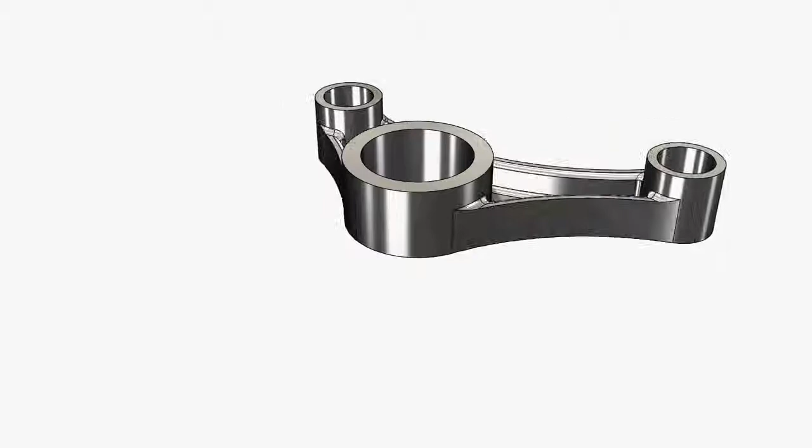In this video, we're going to take a look at the Model Mania Design Challenge from 2013. If you're unfamiliar with Model Mania, it's a design challenge held every year at SOLIDWORKS World where attendees are given a drawing like this, and they're tasked with creating the part in SOLIDWORKS both as quickly and as accurately as possible. Now, if that wasn't enough, when they're finished, they're given an additional drawing with a series of changes and tasks to perform on the part.

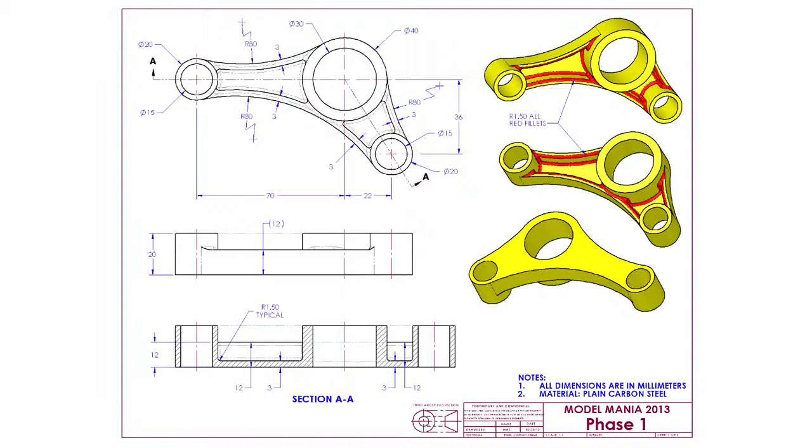For this initial phase 1, let's take a look at how we'll approach this. Most of the geometry and dimensions are defined in the top view. It's actually a pretty simple part to create. It consists of 3 circles with bores going through them and a series of walls joining them together. You can see in the front view in section AA that these are all extruded slightly different depths in the up direction. Finally, do notice that a material has been specified over in the notes section of this drawing.

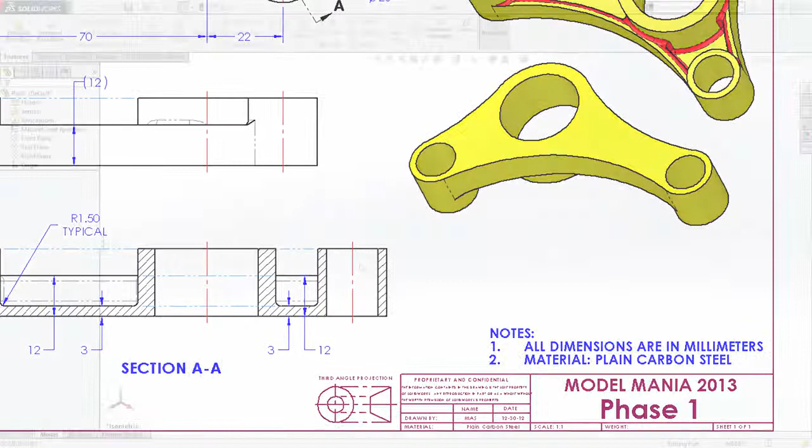So let's dive in and start with that top view. We're going to leverage a sketch that contains all the geometry and use contour selection when we go ahead and create the features for this part. We've discussed this in great detail in many of the videos in this series.

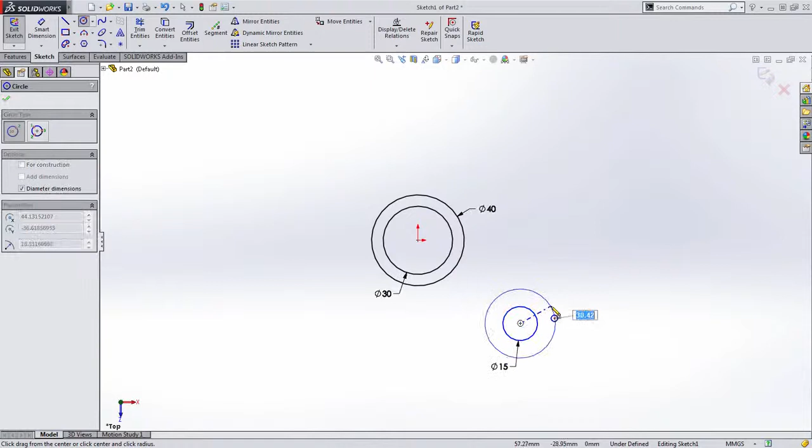I'm going to go ahead and just start sketching out this geometry by typing in the values where needed. In this case, it's just a series of circles which have pretty simple dimensions on them. 15, 20, and then you can see I've already defined some of the other dimensions. These are then defined by distances from the center. In this case, 22 millimeters to the right, and down from the top, this is going to be 36 millimeters. Notice the geometry turns black, letting us know that it's fully defined.

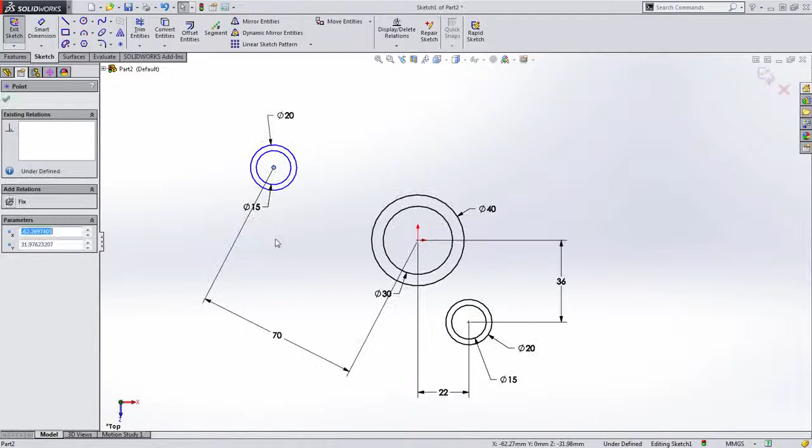Let's go ahead and define this circle out here to the left-hand side at 70 millimeters away, and notice when I add that dimension that the geometry is still blue. That's because we didn't do anything to establish that this circle is always horizontal to this one. So I'm going to select the 2 center points and choose horizontal from the quick pop-up menu. So that's all fully defined.

There's also a series of arcs that joins this together. I'm going to do this by creating 3-point arcs from one circle to the next and approximately drawing it in place. We can also put the radius in there while we're creating this if we want, just by typing that. So again, this is 80 millimeters. But notice when I do this, none of these were created tangent to the circles that they're attached to.

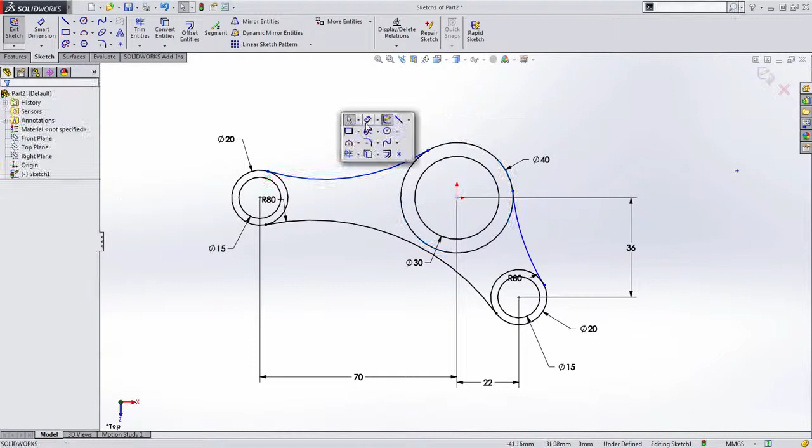So we're going to go back and add those tangency relationships at each one of those intersections between these. I'm going to just go ahead and window select those, and we didn't add a radius here, so I'll add that now. And again, let's just add these tangencies. I'm going to just move these radius dimensions so that they're a little bit easier to see. Now notice I did define each one of those individually. That's how they were called out on the drawing.

And the last thing we need to do is go ahead and do this wall offset while we're at it, of 3 millimeters. So I'm going to select any geometry that I want to add in this case, and notice when I select all of these, I just go ahead and right click and add the geometry like so. Sometimes they may offset in a different direction depending on the order in which you created those, but in this case we were able to do that all with one offset feature.

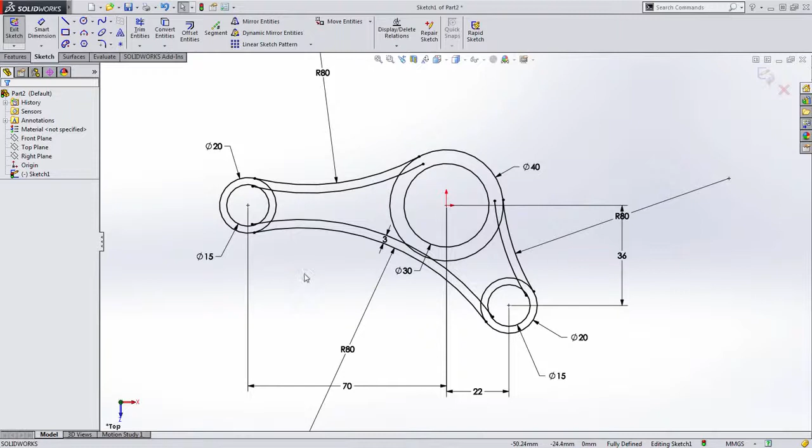Now you're probably thinking I'll need to go through and trim all this geometry up, but that's actually not necessary. Let's go ahead and close this sketch and start creating some of these extrusions.

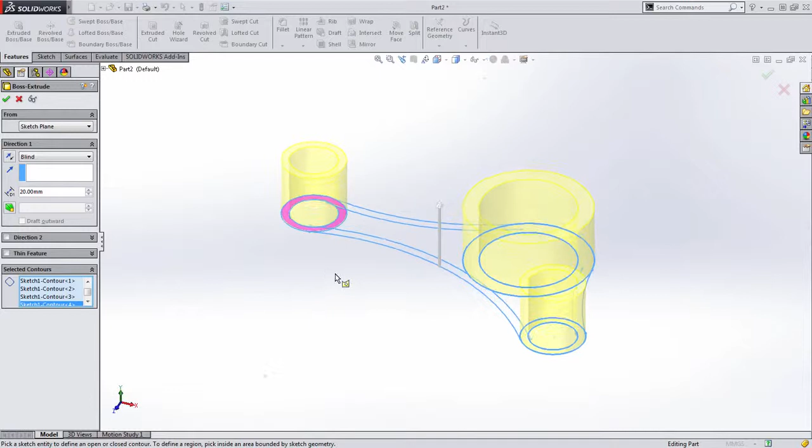I'm going to go ahead and select this circle, and notice what happens when I do this. I'm going to specify the appropriate distance. It created the region up to there. All I need to do is select this additional region. In addition, if you want to make this simple, just go ahead and select the circle itself and then choose the circle in the center to then remove that from that region. So there's really 2 different approaches you can take when doing this. I'm going to go ahead and press OK.

When I do this, you'll notice that a solid bodies folder appears in the feature manager tree. Because these bodies are disjointed, we're actually working in a multi-body part file. That's actually not that important for what we're doing right now, but it will play a role in what we're doing later on with some of the changes.

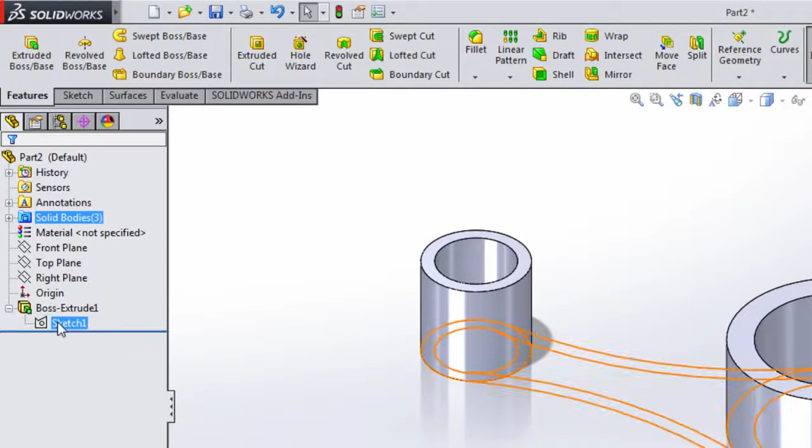Now what I want to do is start joining this back together. In this case, I want to create the walls on the outside. To do this, I'm just going to go into the feature manager tree and reselect that sketch we created and choose to create an extrusion from it again.

Like before, I'm just going to choose the appropriate regions that I want. In this case, the 3 outside wall regions. Now their distance is different. It's 12 millimeters, so I'll enter that in. And notice that merge results is automatically checked.

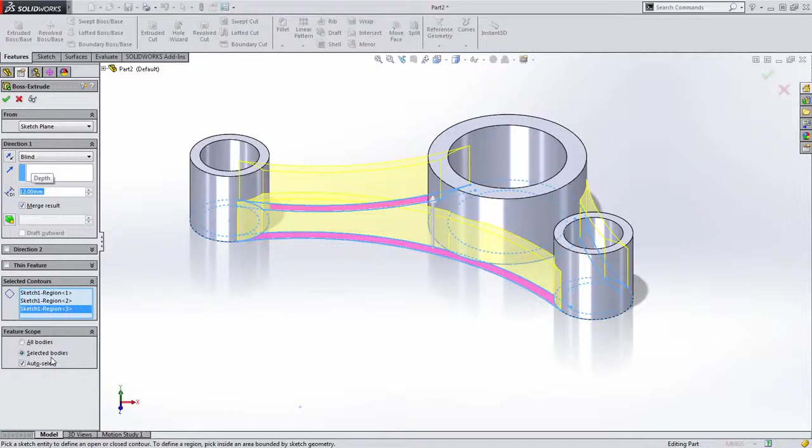This is always the case by default. In addition, the feature scope by default will try to merge whatever it can. In this case, it will end up being all 3 bodies. When I do that, the multi-bodies folder goes away, so adding that feature joined those back together into a single body part.

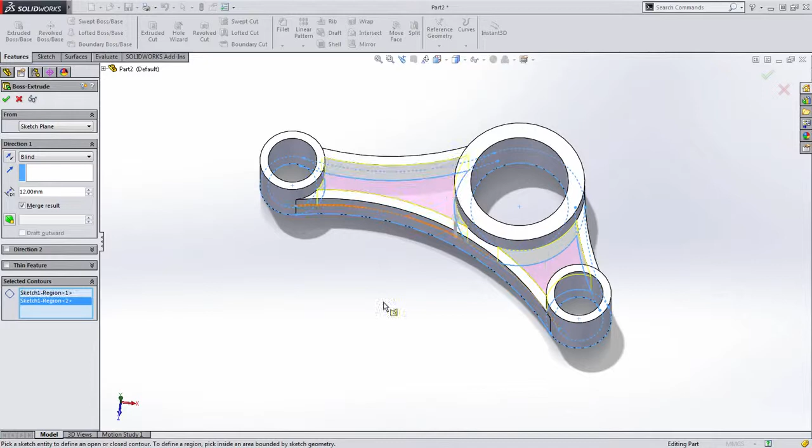Finally, for the material on the bottom, we're going to go back in and choose that same sketch, and we're just going to select the regions on the inside. Again, they do have a different depth, in this case 3 millimeters.

Finally, there's a series of 1.5 millimeter fillets that we want to add, and to do this, I'm going to select these faces on the inside of these pockets. Remember, selecting faces allows you to just select that face, and then it'll automatically capture all the edges of that face, and because of tangent propagation, any additional edges that might be tangent.

We'll do the same thing on the other side. I'm going to go ahead and grab these 3 faces here, and then I'm just going to right click to confirm. So our part's almost done, but there's one critical feature we need to add yet, and that's the material that was defined for this part, which was plain carbon steel.

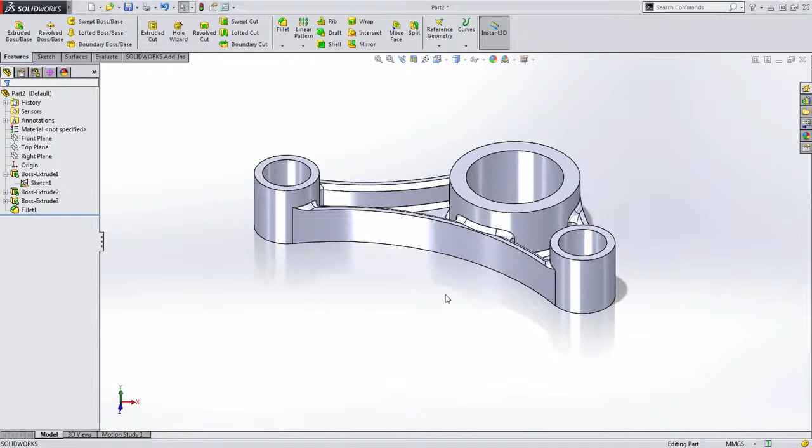To do this, we simply right-click on the material node in the Feature Manager tree. If the material you need is in your favorites, you can select it here. If it's not, you can go into the entire library that's available.

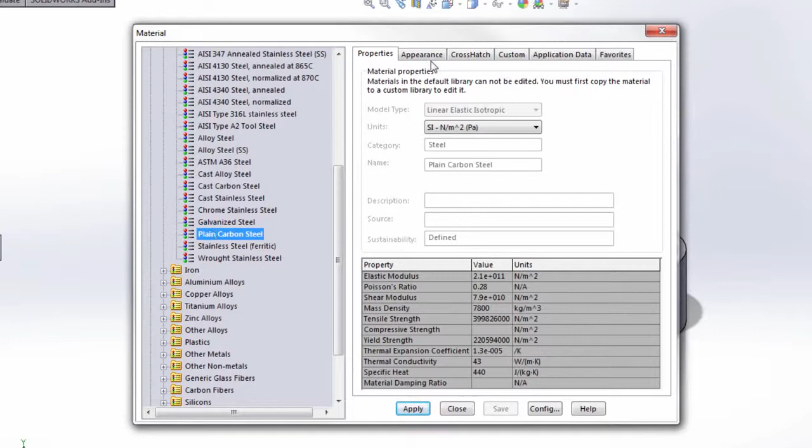When you're working with a library, just choose the appropriate material type, in this case steel, find the material you're looking for, and SOLIDWORKS will automatically apply the appropriate appearance and crosshatch in a drawing, but more importantly, the physical properties of the material, which define how strong it is, as well as things such as its density.

So I've gone ahead and applied the material. When I exit, you can see that it's graphically changed, but if I go to Evaluate and go to Mass Properties, we also get an accurate weight of this part as well.

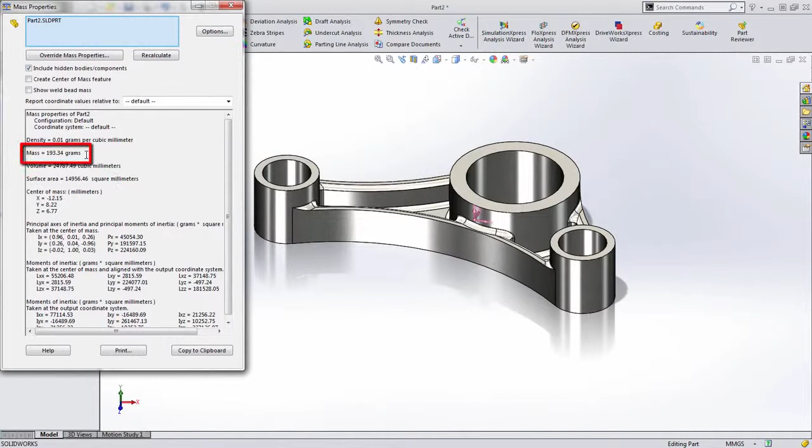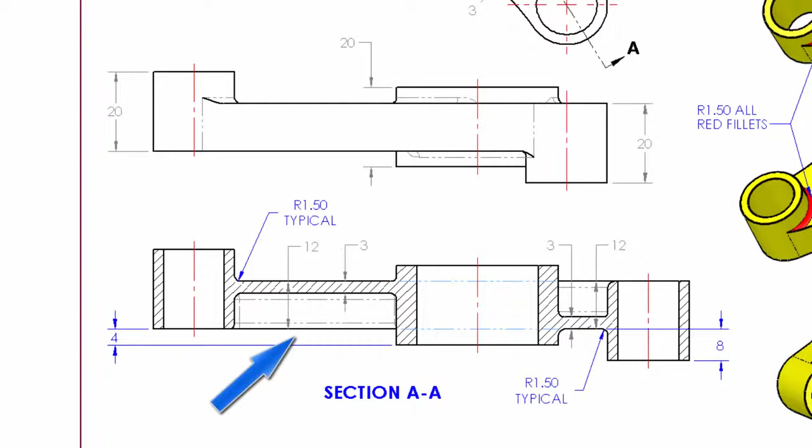In addition, notice in this section view that the bottom surface that we had created is no longer there and instead has been added as a top surface. Finally, there have been some subtle changes made to the fillets.

Additionally, we do need to perform a simulation on this part by fixing the center cylindrical face and applying a load to the outside right face. So let's go into SOLIDWORKS and look at how we can tackle this.

Let's start with the design changes themselves. First, we want to make those adjustments to those cylindrical bodies. I'm going to go ahead and roll my rollback bar back to when we created these 3 cylindrical bodies.

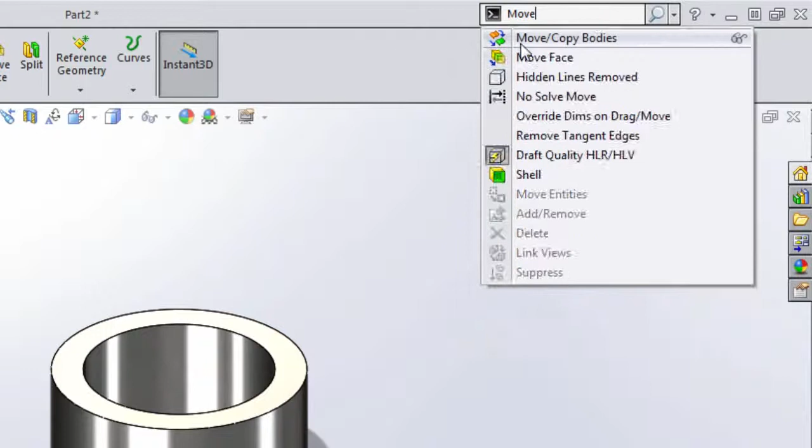If you remember, I made a specific point to mention that we were working with multi-body at this point. This is great because it allows us to, instead of deleting features and adding new ones and applying offsets, just do a quick search in our command search for the Move Copy Bodies command. Likewise, you could have it on your toolbar already. I just don't. Then we can select each body and just make a quick adjustment to it.

In this case, this one is moved down 4 millimeters. So notice I just grab the arrow, drag it down, snap it to the ruler, and press OK. But I had mentioned, what if this was a single body?

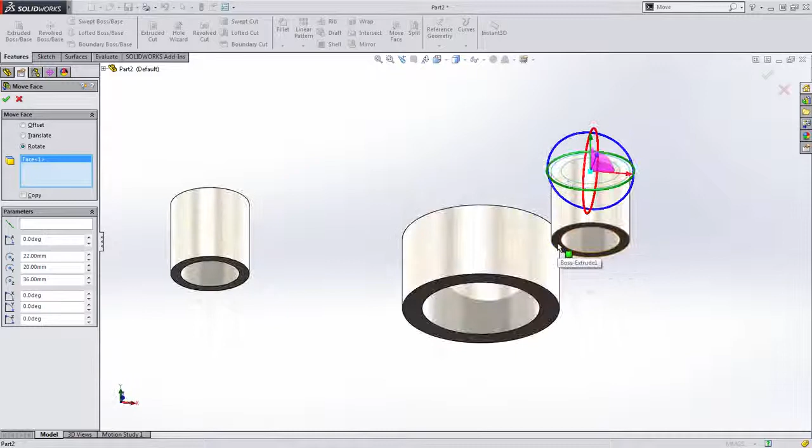Move bodies will move the entire body. Move face, oops, not intersect, let me hit escape out of there. Move face is an alternative where you can grab the faces you want to move very similarly. And in this case, I'm going to use Move Face to drag this down 8 millimeters in this case.

So we've dropped that down, that looks good, we press OK. We get the same results, just one is a little bit easier to use. Move Bodies would be easier when you're working in multi-body. Move Face is great if everything's joined together and you want to just move a few faces. So keep that in mind.

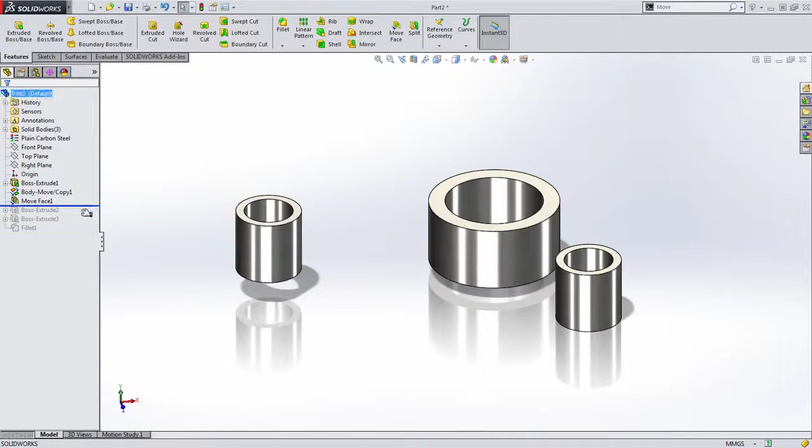We're then going to go ahead and roll down, and notice that our walls don't really have any changes that need to take place to one another. However, when we do look at our next feature, that bottom surface, it no longer exists on this left-hand side of the part, and instead there's a new surface up here at the top.

So what we're going to do is edit this feature. I'm going to deselect this region to exclude it, then go into that feature and reselect that initial sketch, and choose to create an extrusion using that same region.

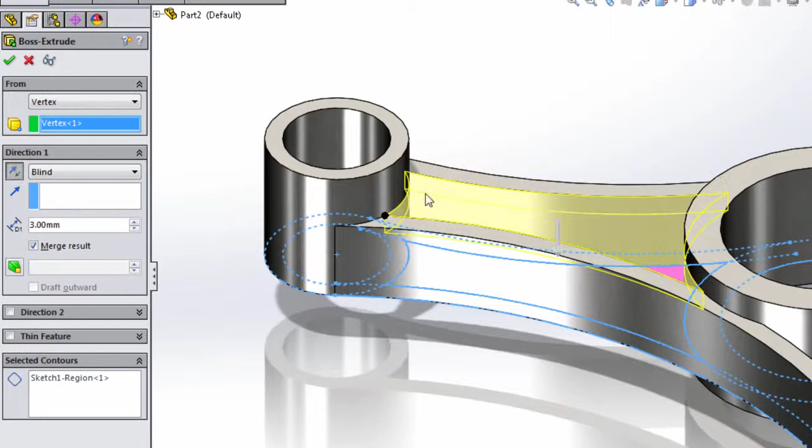Now we want to get the extrusion here just right. An easy way to do this is with the From option. I'm going to choose From Vertex, select a vertex up at the top, then use the direction of Blind and set that down into the part. Very quickly, we've made that adjustment that way.

Now, because we deleted that bottom surface face, some of the faces we selected for this fillet no longer exist, and they'll need to be redefined. So we're just going to come in here and reselect those.

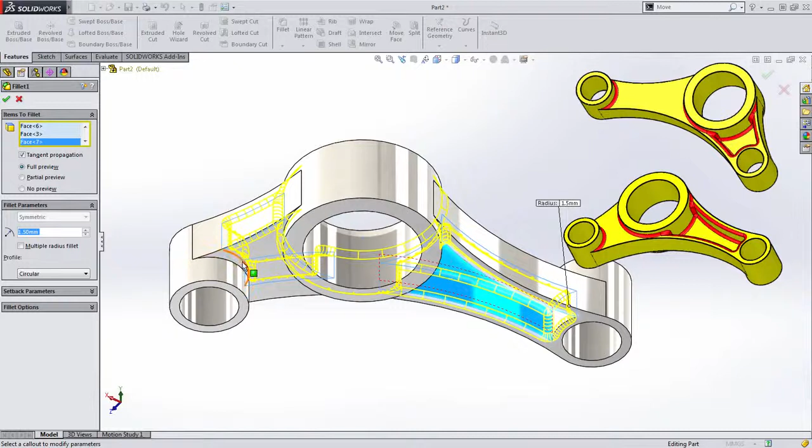Additionally, you might notice on the drawing that these additional edges have been added to the fillets. This is one of the things we mention to check for accuracy when you do Model Mania. Missing a fillet like that could be the difference between winning and losing the competition.

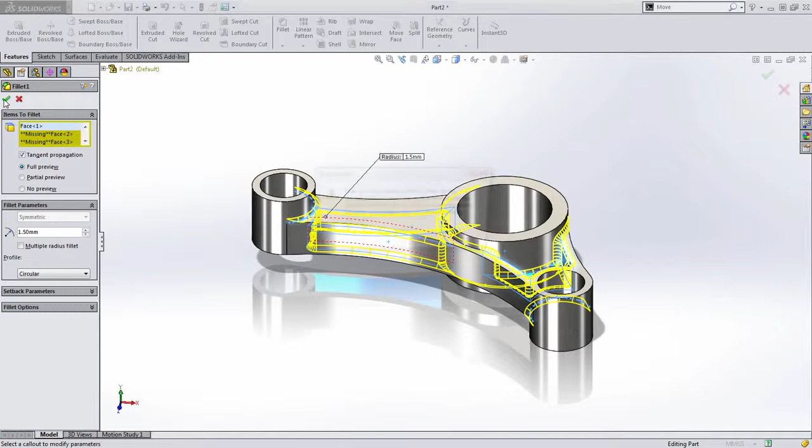Now you'll notice that those faces that are no longer there are still highlighted. You could delete them out of the property manager here, but simply pressing OK, SOLIDWORKS will let us know that there are some missing entities. Pressing yes will automatically remove these, saving us that step.

So we've made all the physical changes to the part here pretty easily using a few unique features: move copy bodies and move face. What we need to do now is perform a simulation.

To do this, I'm going to use Simulation Express because it's found in every version of SOLIDWORKS. Likewise, you could use SOLIDWORKS Simulation, which provides many more options than what we'll see here. Simulation Express is a wizard's format that kind of walks you through the process.

The first thing we need to do is define a fixture. In Simulation Express, we can only add a fixed type fixture. If we were using Simulation, we could use things such as a hinged fixture or sliding face, different things like that. But this serves our needs perfectly in this case.

We're going to choose that inside cylindrical body and press OK. We could add more if we wanted to at this point, but let's move on to adding a force.

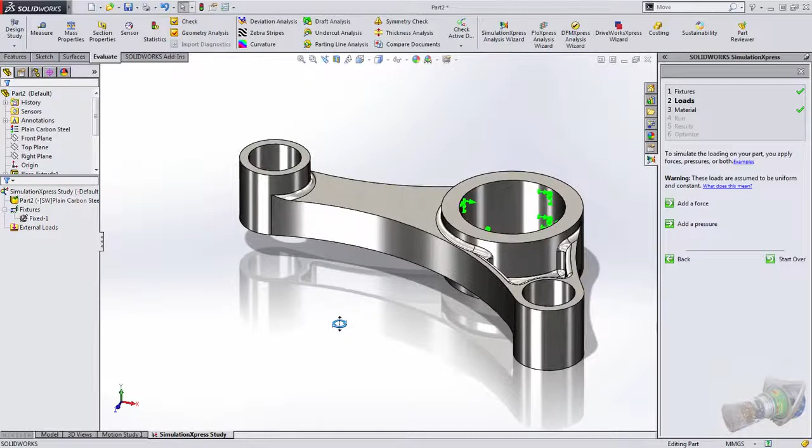Here we have the choice between a force or a pressure. Again, in SOLIDWORKS Simulation, you could add different types of forces. In this case, we're going to just apply a force to this inside cylindrical face.

Notice the direction of the arrows, however, and on the drawing, the load direction is pointing straight down. So we need to fix this by changing to using the selected direction option.

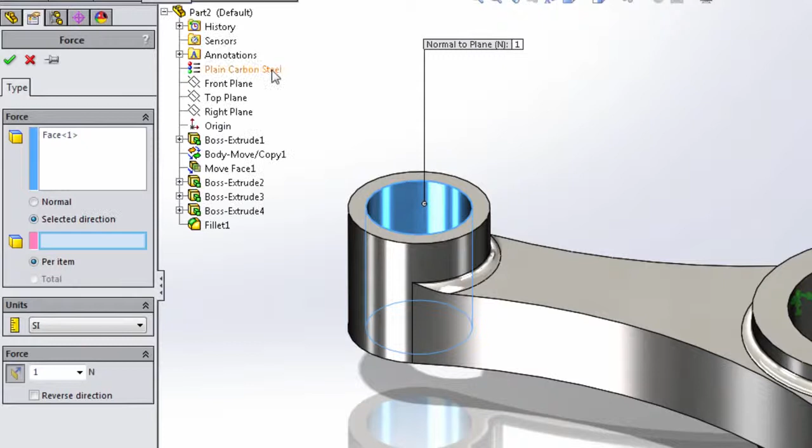We then need to choose some form of reference geometry. Conveniently, our front plane is normal to the direction we want to apply that force, so we'll simply choose that, and then enter the load down here of 500 newtons. We'll then go ahead and press OK.

Again, we could add more forces if we wanted, but we don't need to. And here we would have an opportunity to specify the material should we, or had we not done that before. Notice because we did it before, it automatically captures a lot of the important information we need.

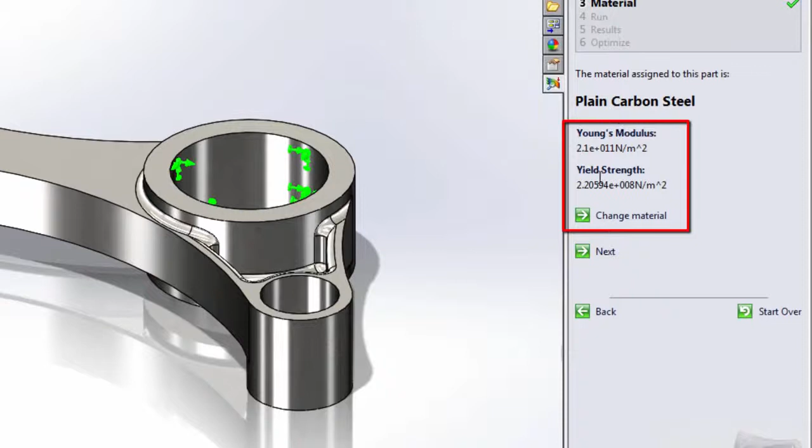So specifying the material is really important because it's not just used for the looks of the part, the weight, or the cross section, but it's also used in simulation.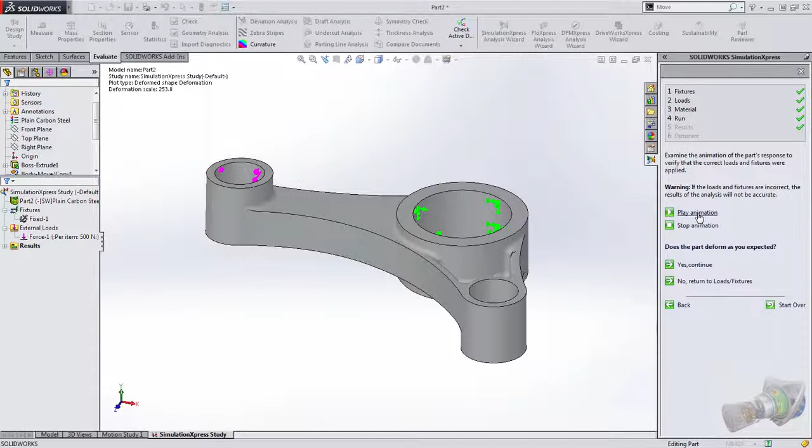Then all we need to do is choose to run the simulation, and really quickly SOLIDWORKS will come back with a series of results letting us know how those forces act on the part. We need to just verify, is this what we anticipated? Yes. If it wasn't, we could go back and make some changes.

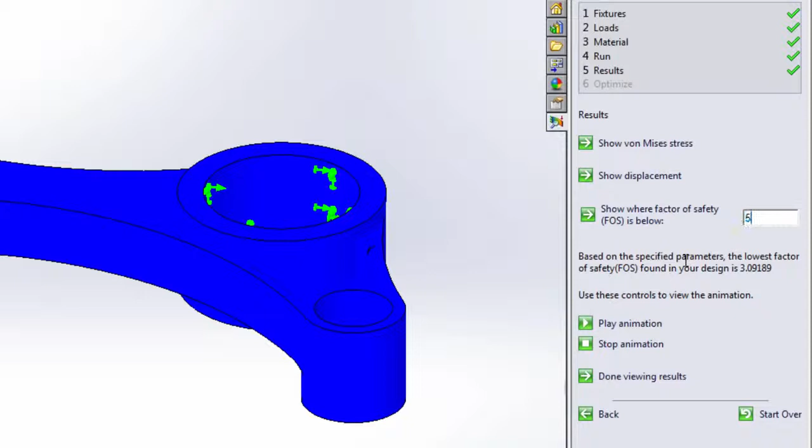And then instantly we're given results. Notice here it gives us the lowest factor of safety on our part, 3.09189. There may be some variance based on how tightly it was meshed automatically. But one of the things I really like here is we could actually look for weak spots in the design by entering an extremely high factor of safety and finding spots in our design that are lower than that.

Additionally, we could also show the displacement on the part in this case. Here we see this in scientific notation, but again, if we were using SOLIDWORKS Simulation, we could customize this all we want. For example, using a floating point decimal.

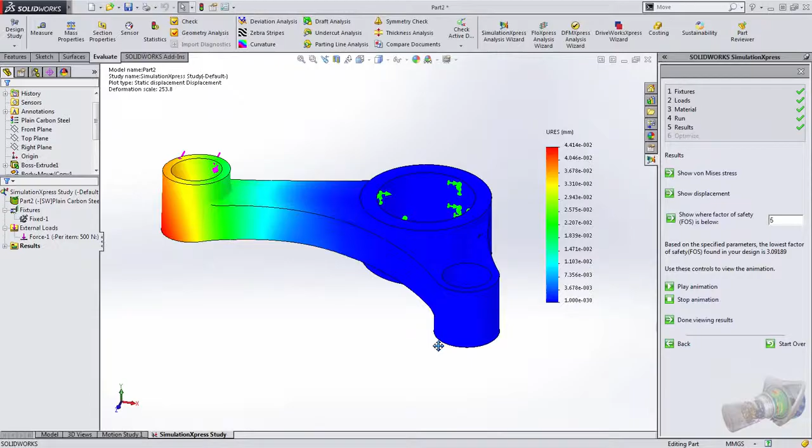So there you have it. We've done the Model Mania Design Challenge from 2013. We made several changes to it and even performed a simulation at the end.